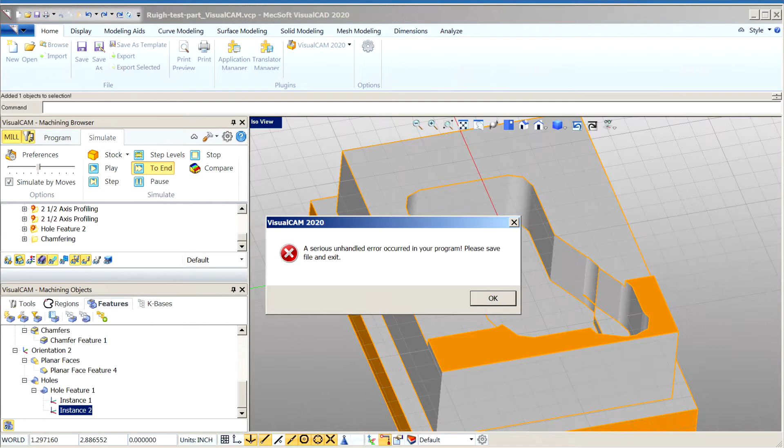I got a crash. It did automatic feature recognition better than in SolidWorks. Found some stuff, I didn't go through it yet. But then it crashed when I tried to simulate it. So that was disappointing. What else did it do?

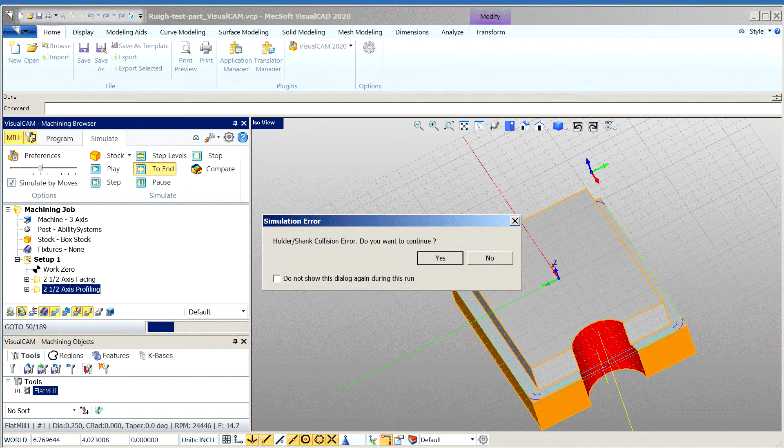It did a tool holder crash. That thing where if it has rough and finish and pocketing and you can remove a slider, it's really cool. Well, if the slider's all the way, I think it does a rapid down through the part and into the vise, through 3 feet down. So here's a picture of what was left after the simulator got done, and said, by the way, did you want to run the tool holder through the part?

That was kind of disappointing. But let's go look at it. It comes up like this. FreeMill is this demo package. It doesn't do justice to how good this program is. It comes across real simplistic. I wouldn't mess with it. Watch these videos or watch other videos.

You want to run the CAM demo. This is a demo program, so you're not allowed to save. I don't want premium, I think that's about $10,000. Professional's full 3D, I think it's $5,000.

Then you re-hit the mill button, and up comes the standalone version, so you're not in SolidWorks anymore. Like in SolidWorks, you want this nice and wide, because then all of this stuff shows up. Like in SolidWorks, this button does all this stuff down here, off, on. And in this button are tools and regions and features and K-Bases knowledge bases and stuff like that.

I put it into turn. Oh my, profile nest, mill. Okay, so we'll take that off.

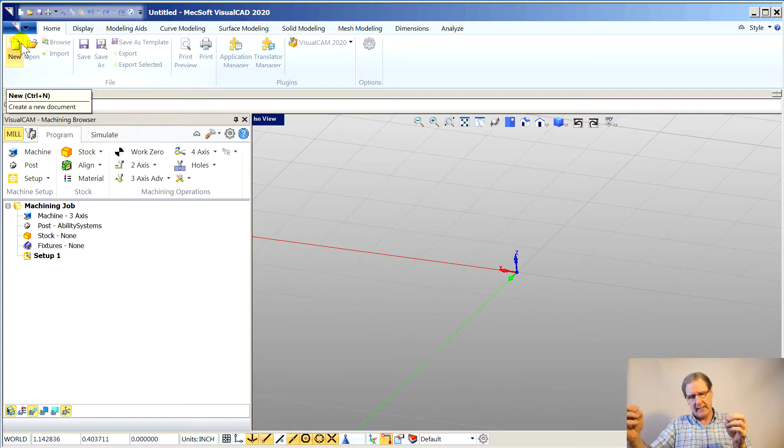For opening, the benefit of SolidWorks, both for CAM by CamWorks and VisualMill, it saves all the tool stuff, all of the G-code stuff. It saves it inside the SolidWorks part file, the SLDPRT. This one creates a new file. So that's configuration manager - is this the file I made from that version? So that's a major reason to be thinking about getting something that works inside SolidWorks. You're just keeping straight of what machining part came from what design part.

So here's where you go home. You say open, and here's a part. See, this has already been saved. VCP is their VisualCAD part file. Here's all the things it imports.

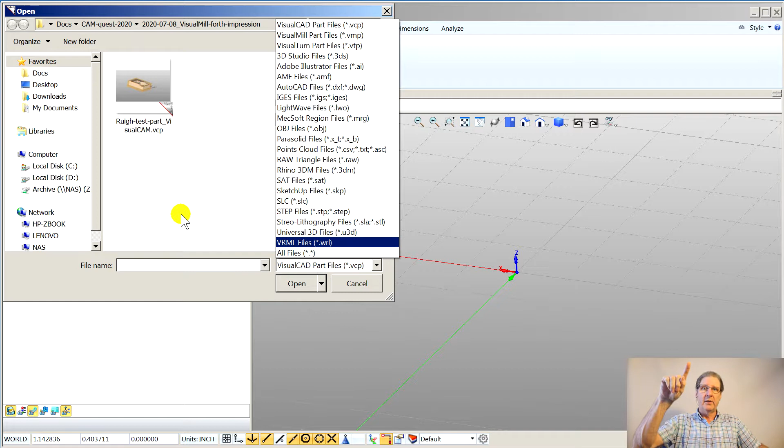So I made this file by importing - I went into my SolidWorks, this Dave Ruigh's part, the one that he made to trick up CAM packages. I exported it as a SAT file, a STEP, and a Parasolid. All of them loaded up, all of them came in here, all of them had the right units, miraculously, although I did have to change VisualMill over from metric to inch. It started out life in metric. But we can just start with this part that I've already saved.

Ask the same question - there's CAM preferences in here. I'm not sure what's going on there. I've already done some options. Here's options, this is the same ribbon style thing. You can disappear, you can make it appear.

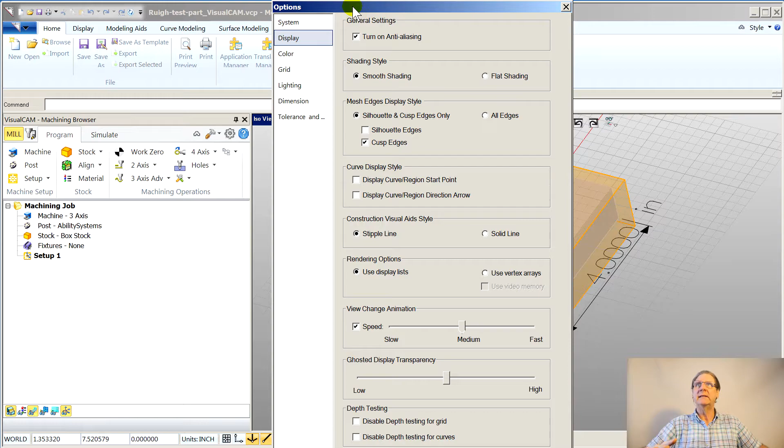Some of the things I did were mostly dimensions. I went to 4 decimal places, all my machinist buddies like that. And then inches here - here's where you specify inches. And when I'd already had the part opened as metric, that's where I noticed, oh wait a minute, go here, find it. Nothing too crazy, right?

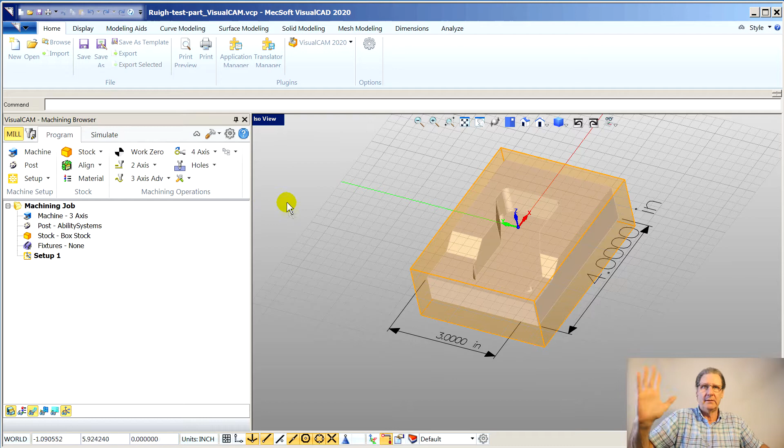All this is standard kind of headache, suffering with software stuff. You should always, when you import anything from anywhere, do some dimensions. That is dimensions here.

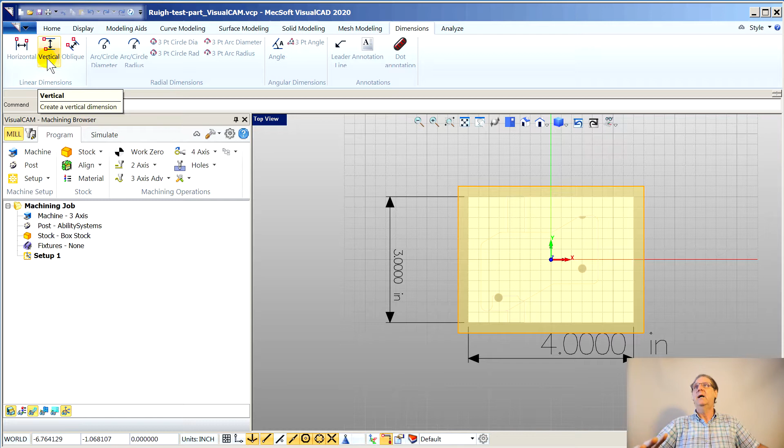I learned you can go top, and then you can do horizontal, vertical. This is all like older - this reminds me of the way AutoCAD 10 used to be. And then, because I went 4 decimal places, you get nice accurate - yeah, this thing is true.

It's accurate, you can see the stock here. You can ignore that, there's the model itself, right? To trip you up, what the middle mouse button wheel does in SolidWorks, the right button makes it swoop around like this. And in SolidWorks, you hold Control, middle button to pan.

In VisualMill, you hold Shift and right button to pan.

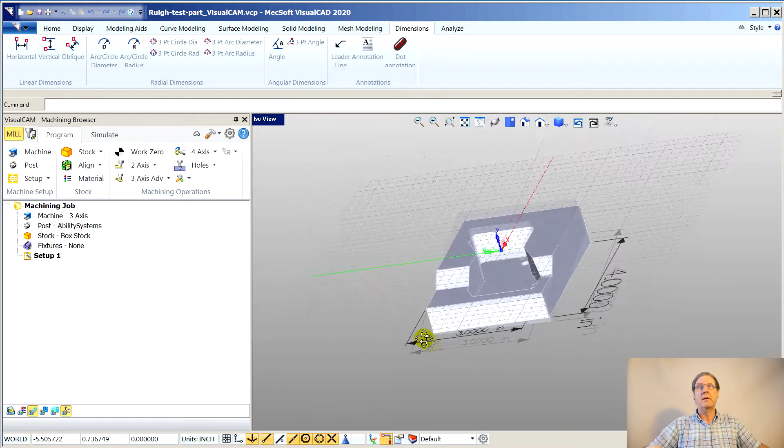Programmers - I don't think there's been 2 programmers born in the history of humanity that have ever agreed on anything. So we'll just have to suffer with this kind of silliness.

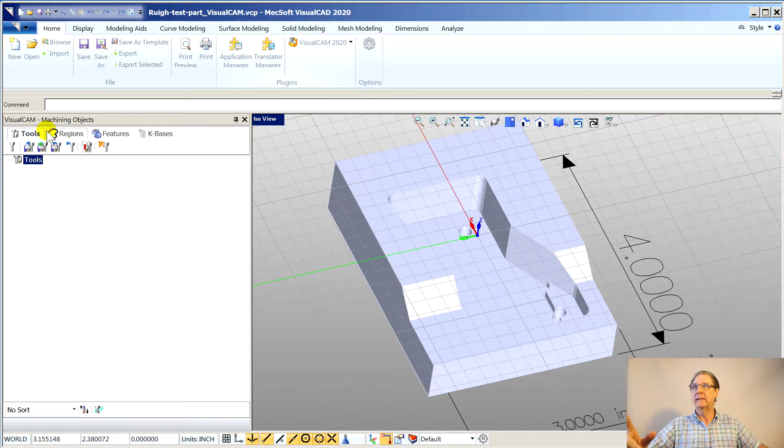Here's the part. One of the things - let's see, since we're going to be drawing, I'm going to jump right into that aspect. Let's close this, which scares you. Oh, how do I get back? That is home, VisualCAM, mill, poof, there it is again. That took a little figuring too. Oh see, now it left that button one open, so close it twice.

One of the things I haven't quite figured out - I go here, I think down here is layers. You can make it wide enough to read or whatever. What I like doing is pinning it, and then, oh gosh, did I pin it, unpin it, get it broken out, and now you can drag it somewhere. You can make it wider and longer, and I drag it off to a different monitor, because you'll be using layers.

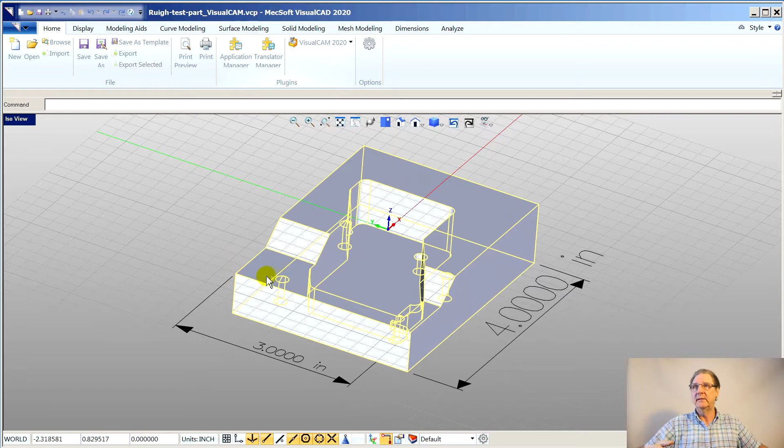This, like I say, it's going back a ways in the way AutoCAD used to work. Still does, I assume. I gave up on it, I had 10 through 14, and that's when I decided no more Autodesk in my life. I started using SolidWorks.

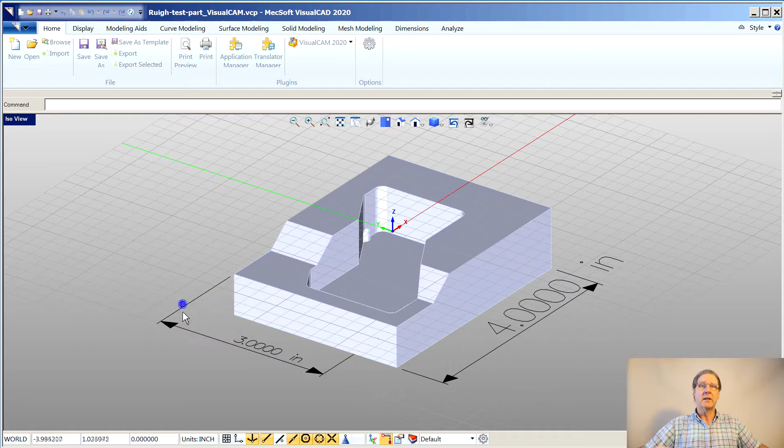So what are we doing? We're showing you some of the things we changed. I'll just start going through it. I'll get to the bug that I can't get around. I'll do that first rather than go in order. We'll face it, we'll profile it - well, maybe we'll get to that before it crashes, because it has been crashing. It's this bottom pocket that caused the problem.

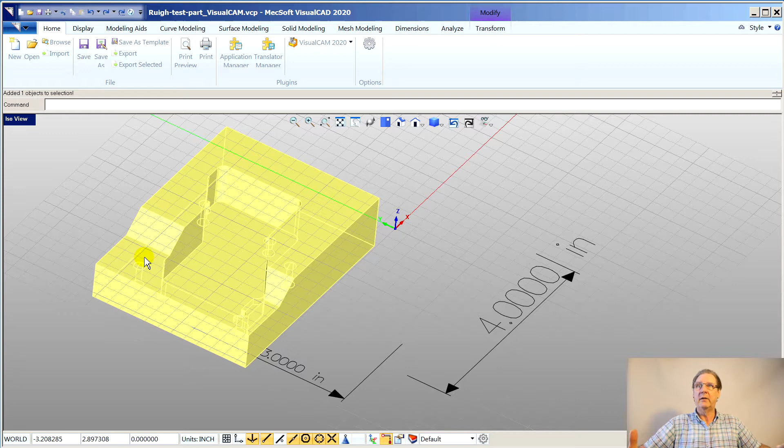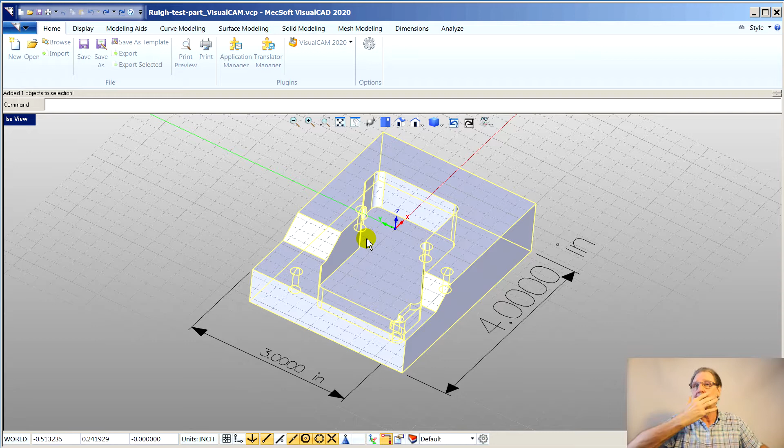Oh, that's what I was going to tell you - one of the things that bothers me. If it was just a left click, you move the part, and I have found no way to disable that. Control Z puts it back where it was. If you go lock, you can lock the layer, and okay, but then you can't select any edges to do any of the things you need to do. So to me, that's very dangerous. If you accidentally click, double click - newbie like me, not a machinist - maybe it moves a tenth of an inch and all the tool paths, half of the parts built one way, half of the parts built the other. I don't know why they're so anxious just to move stuff around with a simple left click.

But that's going on. We're going to go do the sketch stuff.

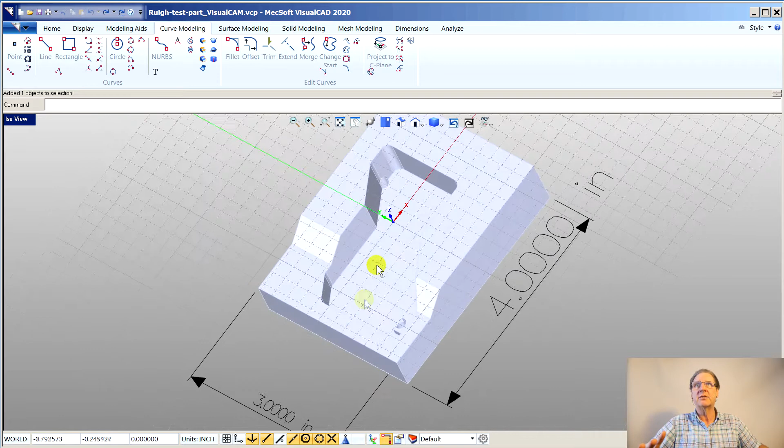One of the key things, where is it - curve modeling. I guess a line is a straight curve to these people, because that's where all the draw stuff is. We want to get this shallow pocket, the one down here, because that's the one where I had to, in SolidWorks, go and bridge across this breakout hole and bridge across this other breakout hole so that the toolpath would be correct - it wouldn't bulge out where that hole broke through.

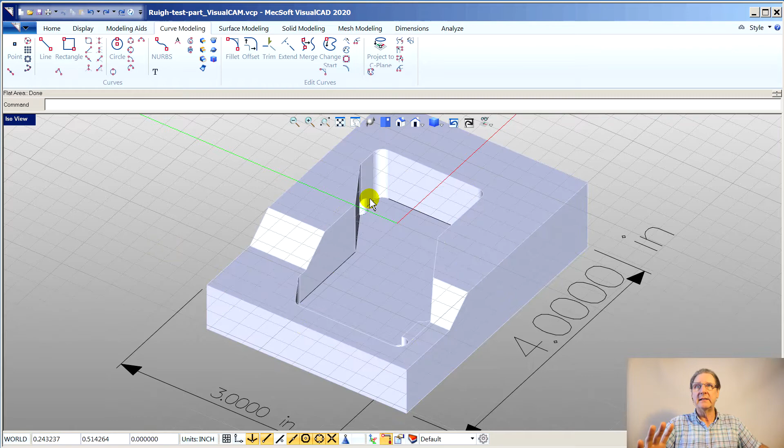So the way I found to do that - could we turn that off? Yes. It's here, I think it was create boundary from selected flat area. Not all, not a silhouette, not a surface, not a face edge, not section curves. Okay, I think it's this - flat areas, you go there, and it's hard to see, like the corners didn't show, but it's got black. Now, one mistake is it put it up high - or no, it didn't put it up high.

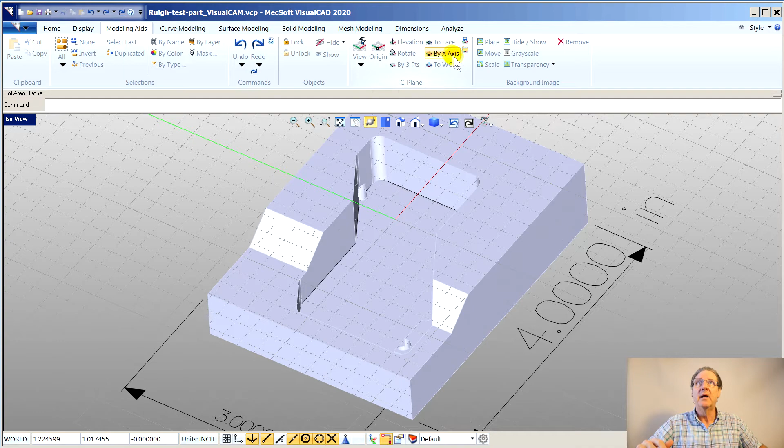This is something also you want to do. Let me think, I think it's modeling aids - C-plane, short for construction plane. You know, you're supposed to - everybody's worked in CAD for 40 years and knows that, right? To face, go down here. Now it moved that construction plane down. That's just going to make things a little more convenient. It's not essential, but like if you're going to see, as we start mirroring stuff, it'll go to that construction plane.

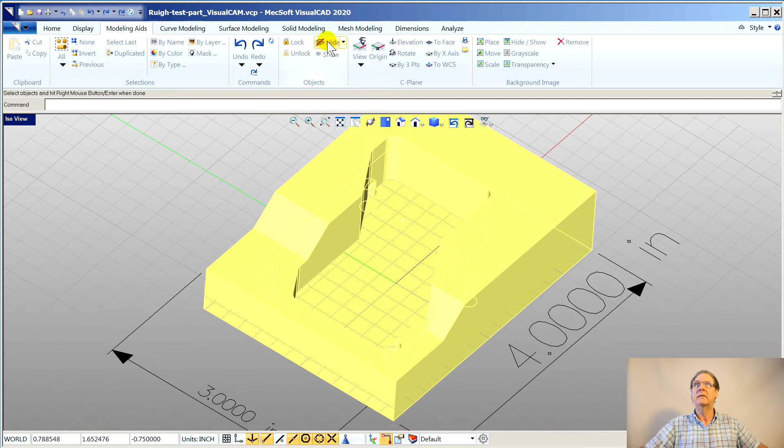So one of the things that was so clumsy about this - I learned modeling aids, say hide, pick it, say hide again, I don't know, and you can get the thing to disappear. Oh, here, let's do this - we don't need these, delete. We know the things came in the right size.

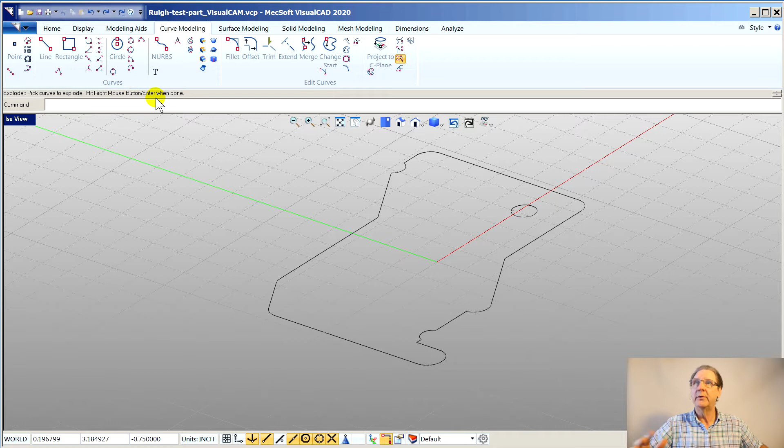It selects - it's a continuous, like a polyline in AutoCAD or TurboCAD or SolidWorks. So the first thing you have to say in curve modeling - I'm going to be a little clumsy on this because this is all different than what I'm used to - break, explode. It does have right here, see right here, explode, pick curves to explode, hit right mouse button or enter when done. So that's kind of nice. Boom. So now it should let us do individual - see, now it lights up individual things.

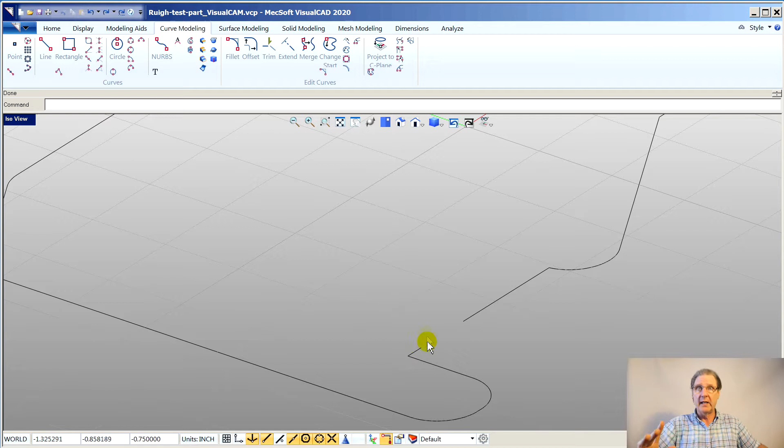So this is the one we want to get rid of, delete. What I did is then I went immediately to extend, thinking it would extend to this line end. No, it extends to the corner here, leaves the line end, but doesn't make it clear that there's a little line segment there, and you spend a half an hour trying to find the open contour that it complains about.

So you got to be sure to know what it's doing to you. But then other stuff works really nice. Extend, bam, done. Now over here it's a little uglier. What do we do? Shift, there. If you remember, well you probably didn't watch that one, but you got to erase this, this, and this, okay?

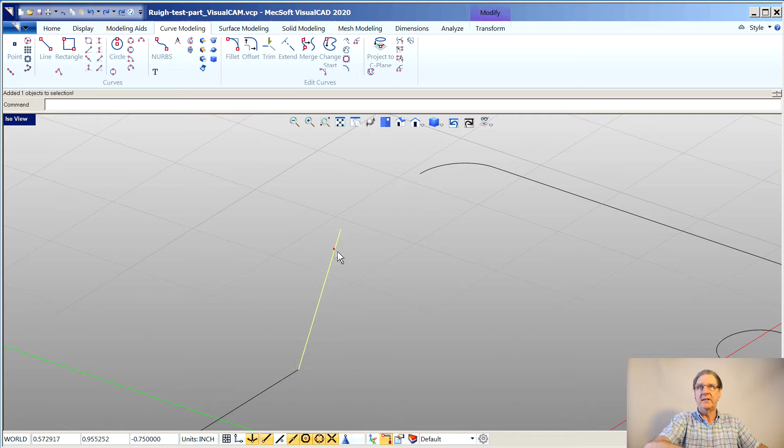And now we go back to modeling aids, show. And, oh wait a minute. Let's do something just to make life a little easier. Hide, hide. Let's go here.

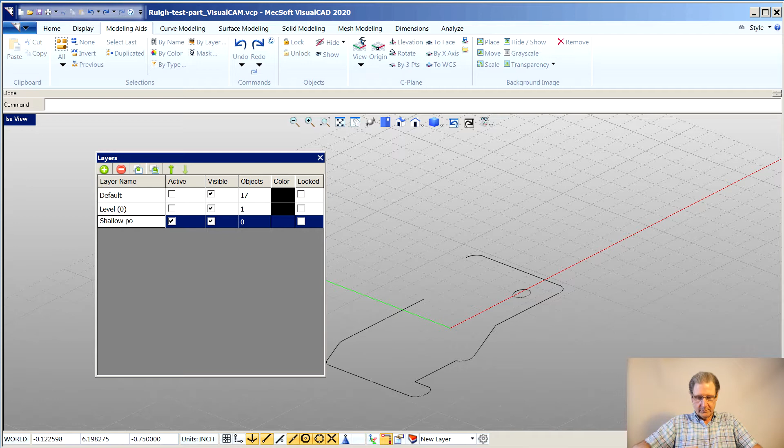Let's get our layers. Let's go plus for a new layer. Of course, then make this shallow pocket. Let's make the color bright red. Sometimes it's a little easier to see.

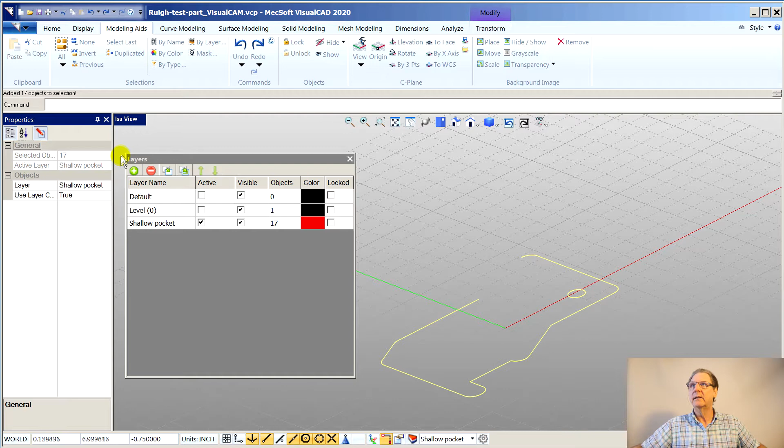It's now active, and I think if you go here you can go properties. A lot of ways to get to it. This is layer, shallow pocket. Now it turned red.

Same thing, you can lock these. This is at least a little more convenient. You can lock this if you're worried about accidentally dragging this around a little. So we got that. Okay, life is good.

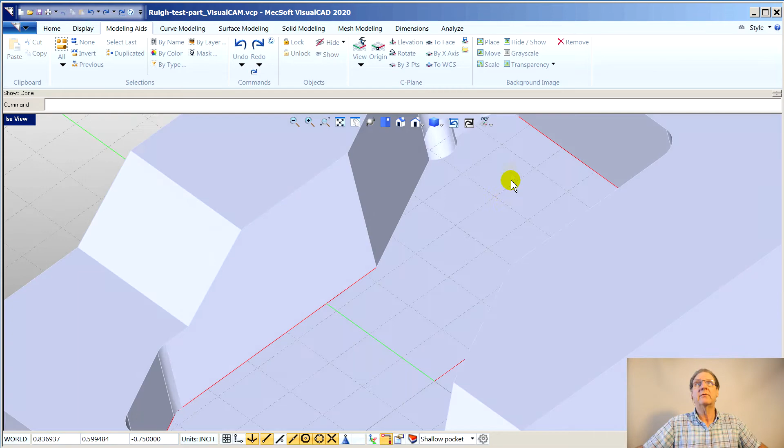Modeling aids, show. I had a lot of trouble, and I assume we're going to have a lot of trouble still. And see, this was designed, I don't know, for 386 computers or something, because you can't really see. You can't see, I can't point at it with the mouse because it lights this stuff. But right here, right, it's disappeared.

That exists, that curve is still there, you just can't see it. That caused a lot of grief. So then, what was the thing I did? It was curve modeling, I think it was edge, something about edges. All flat areas. Extract curve from face edge.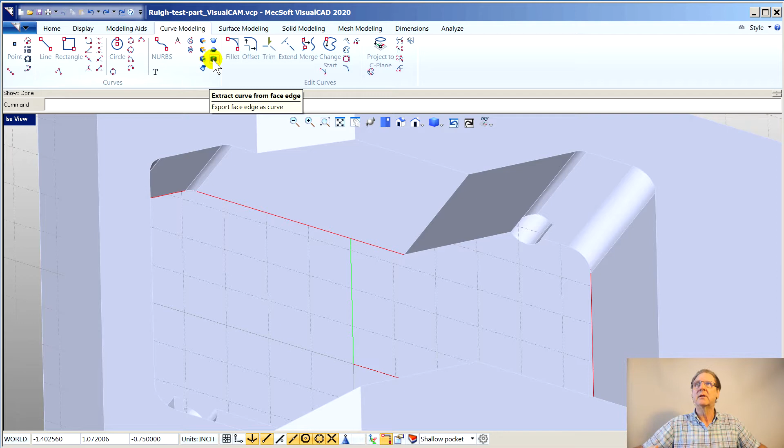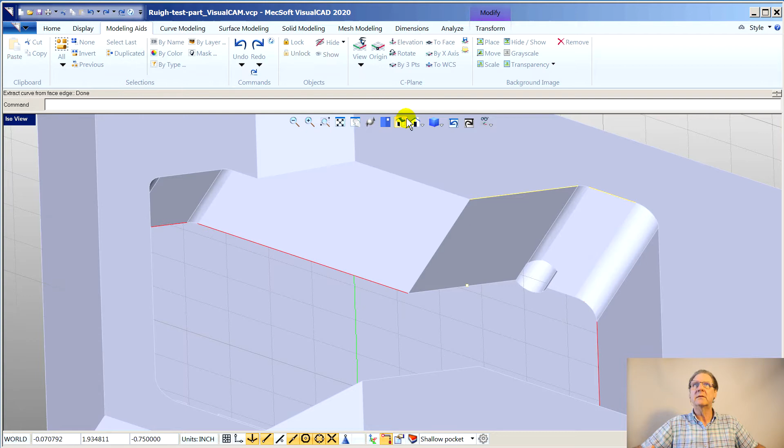See, but a face, I think, is a flat thing. So it says extract curve, select face edges, and hit right mouse button. So I think we should be able to go here and here and hit right mouse button. And then, because you got to pick it, hide.

It's done up here. I've learned it's actually, what do you do? Move. You can then, it'll snap here and snap here. This is, if you can find it, there.

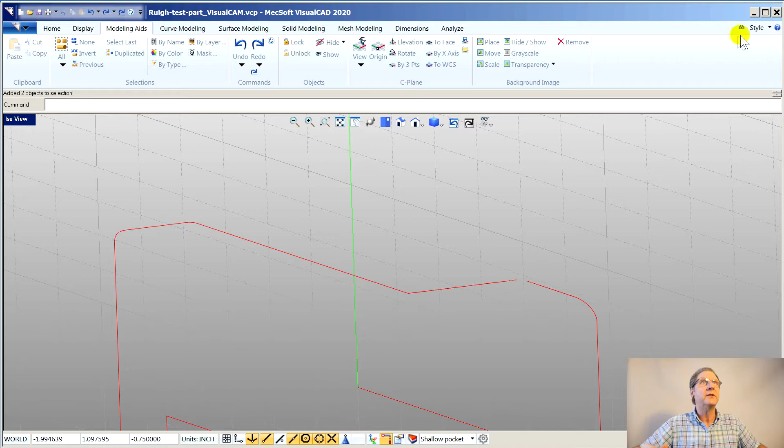Now here's the headache, here's the sorry, can't buy this if it acts like this. And it might just be because of my installation, because there's a Windows 7. Although look at this, look what they do. They're so stylish, and you can select the colors and the theme, if you will. Windows 7 is right in my comfort zone. I love it.

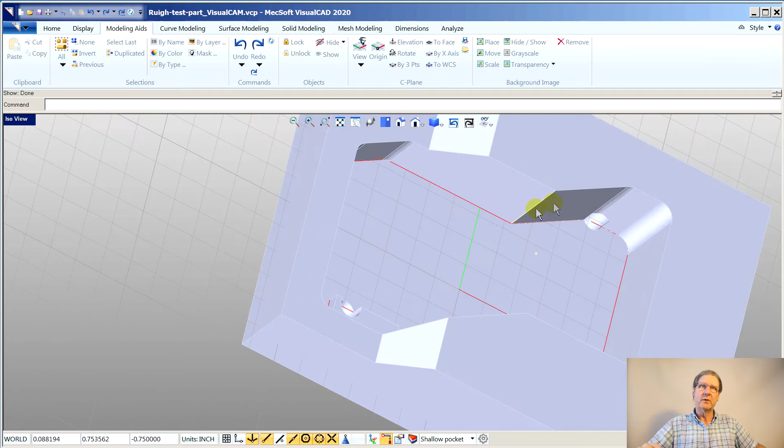So right here, you say, okay, we know how to do this, right? We've been there. Get modeling aids, show stuff so we can see the darn thing. If you're like me, you get lost. Okay, so here's where we're at. This little curve that's up top, we want to end up down there. If we have to move it, that's all okay. We just want that curve.

So I say, watch it work this time and embarrass me. Curve modeling, create section curve, extract curve from face edge. Let's see if this does it. Get up a little closer.

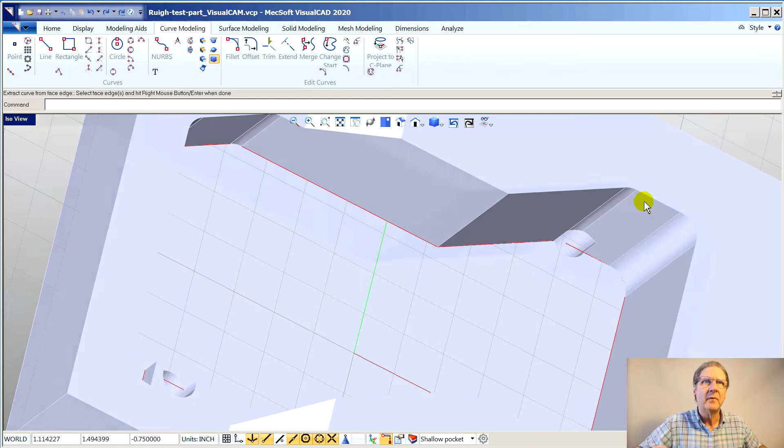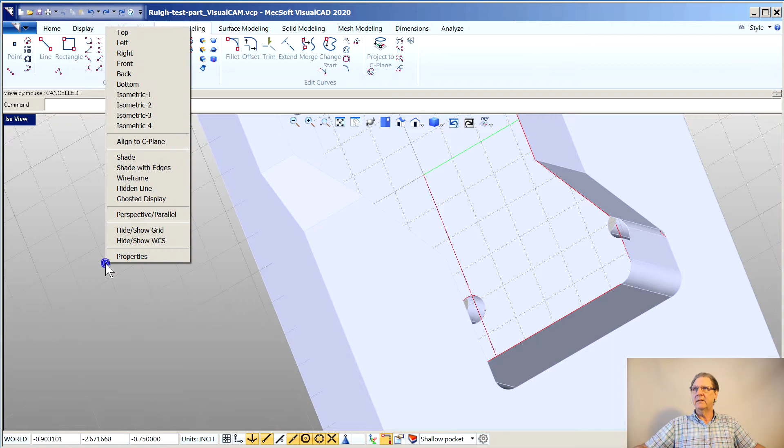See what it did? It's red now. Here, let's do this. No. Come on, come on, come on, come on, come on. Stop. Ah, God. Am I still in some command? It never used to work like this. Stop. All right, holding the shift key because everything's...

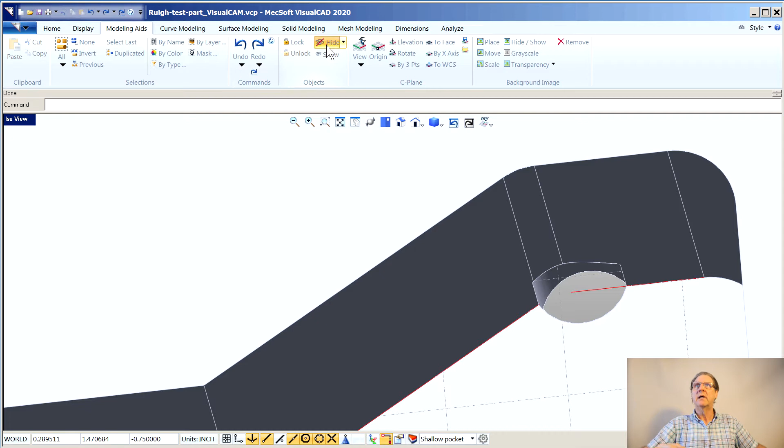It makes some mirrored, weird thing, and I have not figured out how to get a proper curve. Sorry, now let's erase it. Let's hide our goofy... hide here. Hide, I always end up doing it twice. And what I had to do, kludgy as it sounds, draw an arc, which of course is totally unacceptable. That's why, to me, this is a killer.

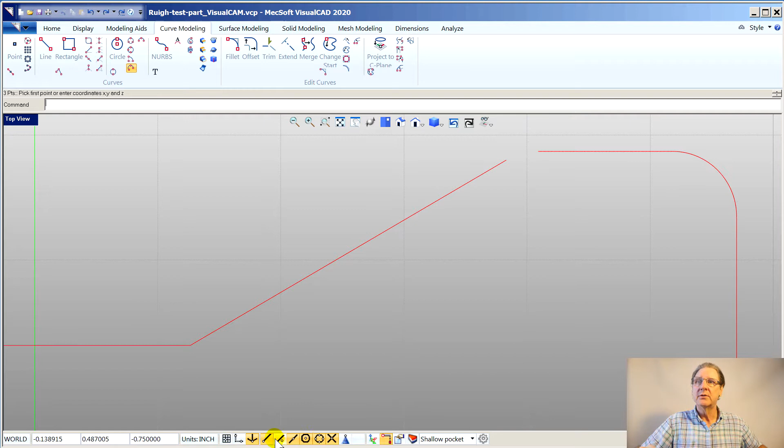Oh, where are we? Curve modeling, 3-point arc. It's got all the snaps down here. This I love, right? They use the status bar. They got some stuff to do down here. So these are the snaps. So that's all normal stuff.

I can't get it to behave the way I want. You got to be careful if you over snap it, we all know that problem, right? You get little line segments you have to trim. So I'm just going to try to guess right there. Trim. Hopefully I haven't left two, right? That's the usual SolidWorks, AutoCAD, TurboCAD misery.

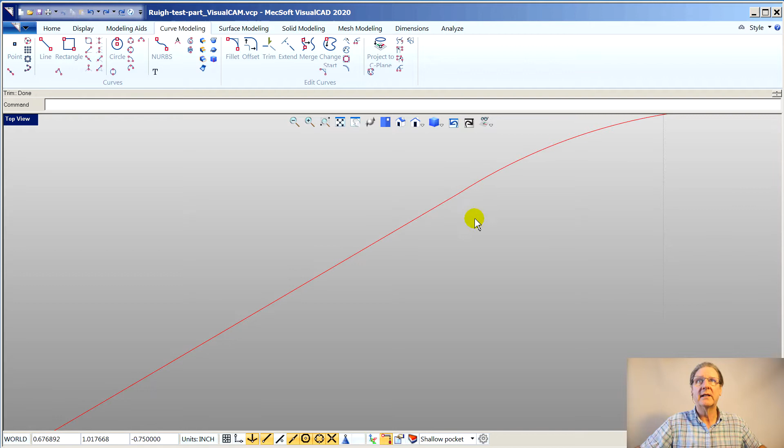Looks like they're not overlapped. So show all. Okay, there we go. Now, let's go turn on our...

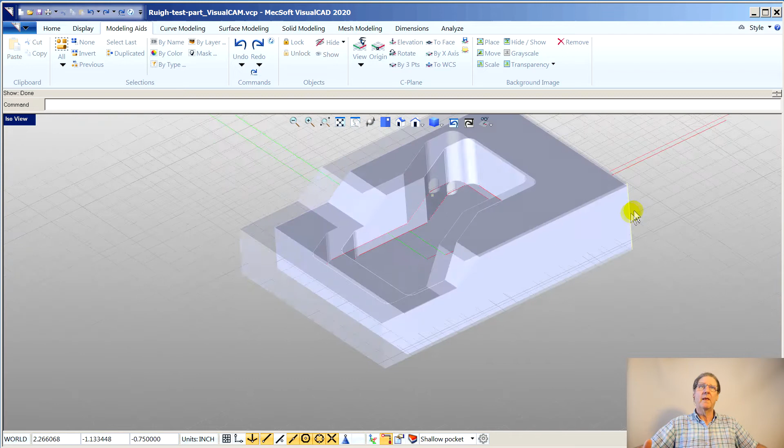See, it's just, you get so confused. Let's go back to this - it's a lot of tedium, right? Just to get to the thing that took 2 seconds. No, it didn't take 2, it took 20 seconds in SolidWorks.

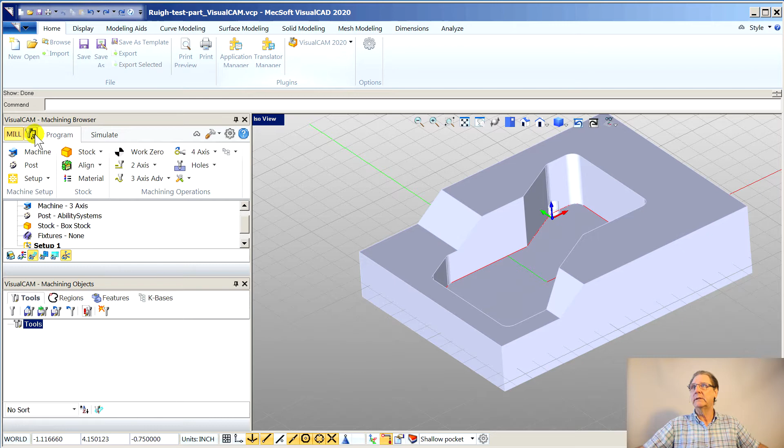What are we doing? Home, VisualCAM, Mill. Here we are. Turn off this bottom panel with this little button. We're in setup 1. Double click setup 1 to get the machine orientation.

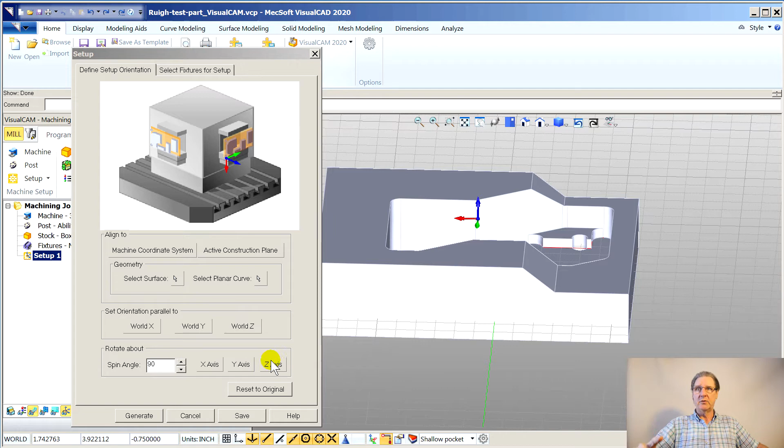I want to put it in the vise like this, fixed jaw in the back here, movable jaw in the front. That means my milling machine, the red arrow is supposed to point to the right, and the green arrow is supposed to point to the back. I happen to know from lots of messing with this program the z-axis is correct, so you say rotate about z twice, once, twice. Say generate. Now that's right, yippee. You notice it also lit up the world coordinate system.

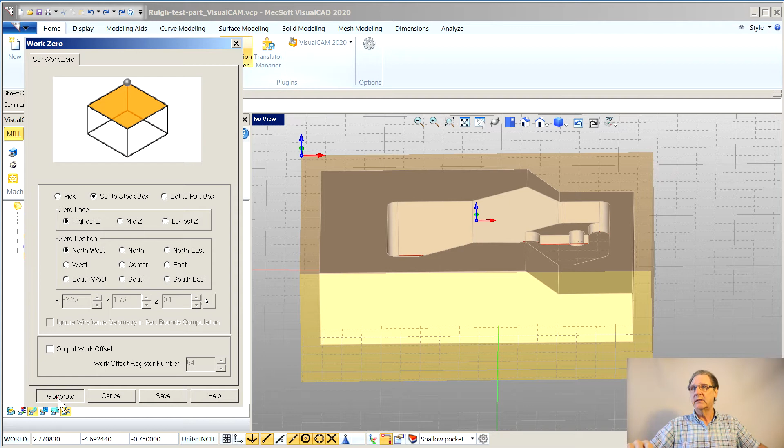Then you do work 0, and I got to bring it in so you see it. Then you won't get the drama if I do it that way. Set the stock box just where I want it - the back corner, that's where I'd put the edge finders and find the corner of the stock to start the machining. Say generate, great. The stock was a bit of a pain, just like in the...

I think I disabled stock, right? It took a while - it's got that same bug where you can put the overall stock size. Let's see how we can do that. Box stock - it's wonderful compared to SolidWorks CAM because you can just type the overall stock dimensions, which you can order from Midwest Metals or one of the metal suppliers. But then it always puts it off on a corner, and you could use these things to relocate it.

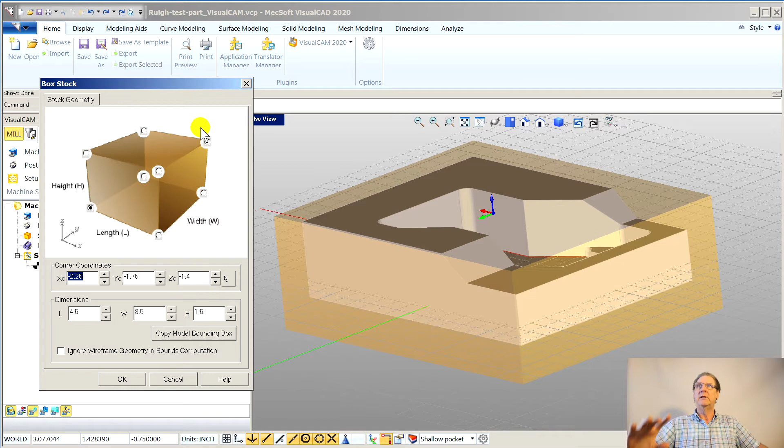But the nice thing is you can say align stock. And what this has done is it's put the part in the center of the stock, which is great for X and Y, and then all you're allowed to do in Z is align it to the top, which made it flush to the top. You see right there? Not too cool.

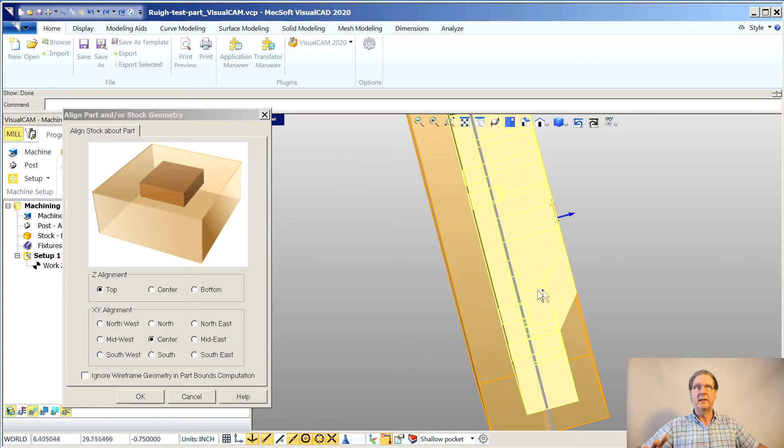Let's cancel out of this. So you figure, I'll align it, then I'll go back to box stock and just move the part down 1/10 of an inch. Now it reverts back - same trick as in SolidWorks. Save it, you're allowed to save it this far. If you don't put work 0, if you don't put anything in, you can save the part, which is what I did, and that's why it came up with the stock in the right spot.

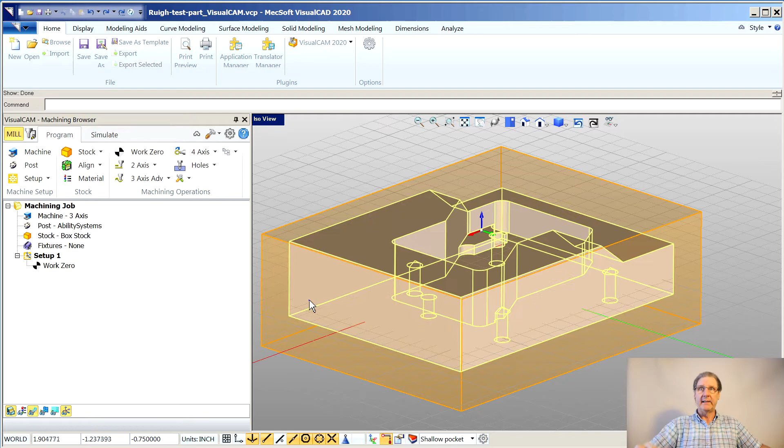So back to draining the swamp. Okay, so let's see what we're going to do. We got our work 0. This might show an interesting problem. We want to pocket - it comes up with the let's get going thing.

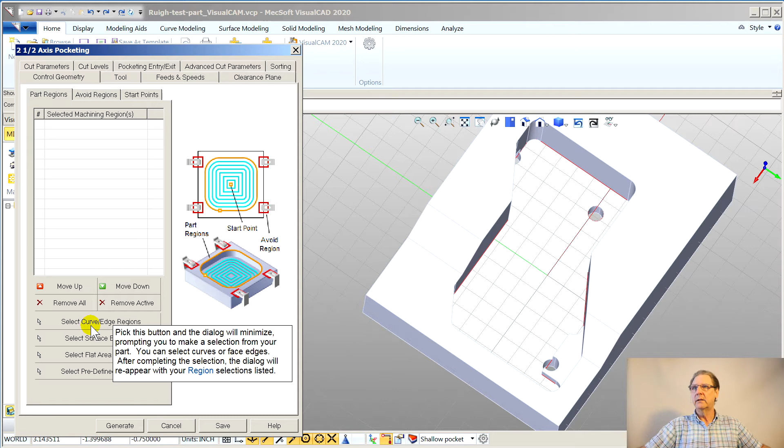Select curve/edge regions, I think you can just do this. No, I didn't get them all. It's like AutoCAD, which I've always loved - if you do that and it's a dash line, anything inside, right? If you just touch it, it'll select. If you're here and it's solid, the thing has to be entirely enclosed.

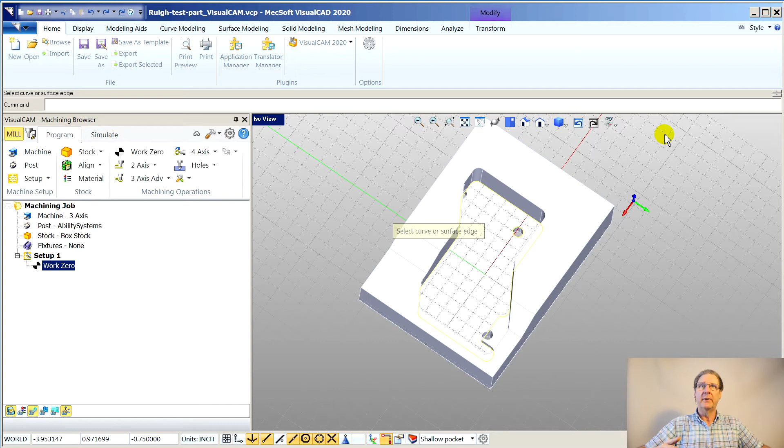So let's do this. Apparently it's smart enough not to do the model. Let's see if - oh, and then their whole thing is you right click, that's how when we were drawing. So you hit the right click. I think it found it all. It might be some open profile. All this might be for nothing.

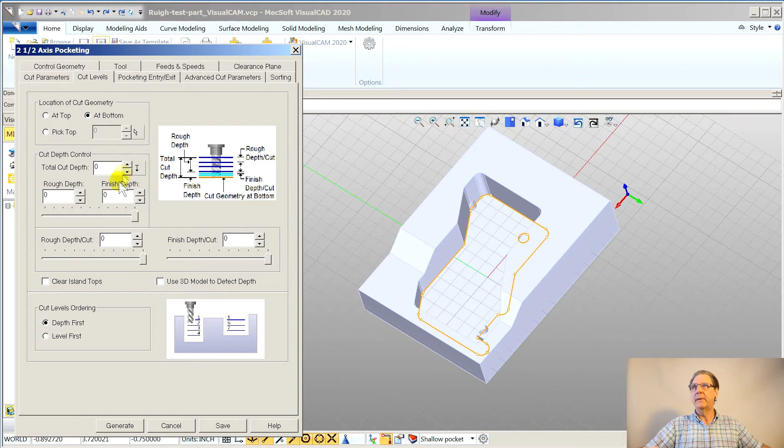Cut parameters, we'll just leave this. Cut levels - the geometry that sketches at the bottom. This is the thing I love about this program, you can specify the depth. Works a little bit different, but right there. Next one, right there.

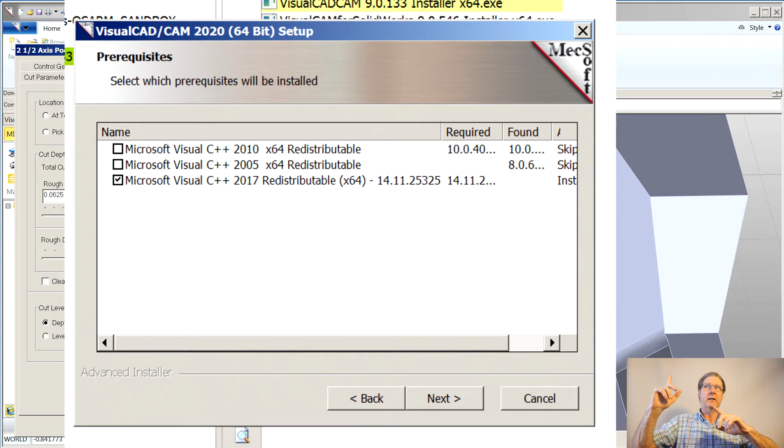0.125 - this is where it blows up. You can't leave it set to 0 here, put it in the middle somewhere. For me, just me, with my old Windows 7 box and this installation that didn't go right because one of the Visual Cs didn't come in. I think I got a screenshot of that. All right, okay.

625, that's good. Generate. Select tool before proceeding, of course. Edit tool - it defaults to a ball mill, one of the minor annoyances. So you go here, pick a flat mill, make it 25. I used to go through a lot of stuff here.

1.3, it has to be at least that long - the tool should be stubby to be stiff. Shoulder length can be short, I think, and then speeds. I want 12,000 here, I know, go 16. Why it fills in these weird numbers, 30, 15 - you need a rounding algorithm. Okay.

This is what burned me last time - saying okay, it didn't create the tool, we got to do it all again. And I'm going to make you suffer just like I just did, because this happened a couple times in the SolidWorks version, and it just annoys the living daylights out of me. Save as new tool is what you're supposed to hit.

Why, well, it's suffering with software - true to the name of the program. 15.

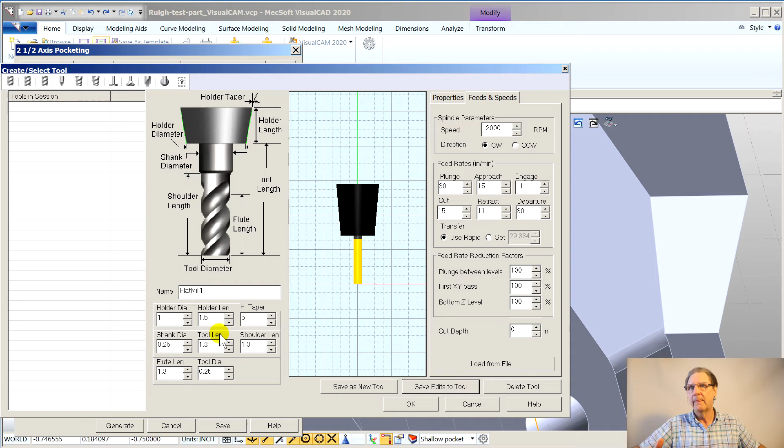Say create tool, make it a quarter of an inch. This is what I've been fighting. And, oh no, I did it again. And then of course it made it a ball mill because that's not what I wanted. Oh gosh, I get so frustrated.

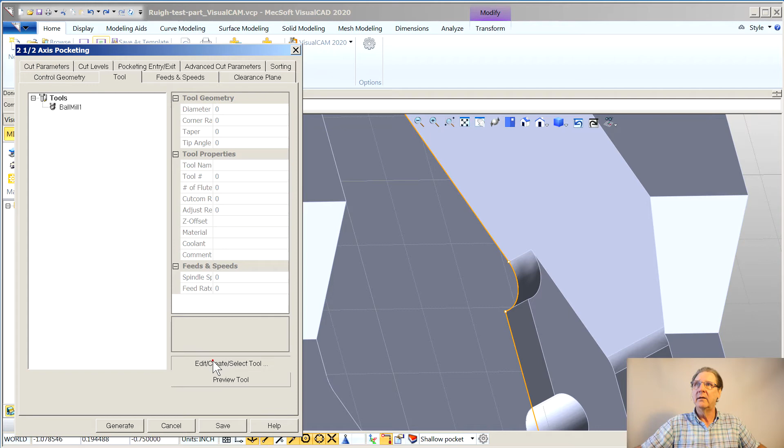Hang on, we're still draining the swamp. Flat mill, 2/10ths, say okay, finally. Okay, so generate.

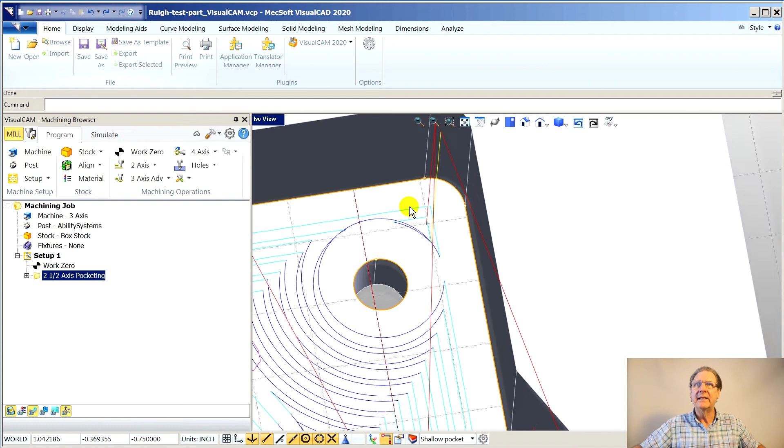It actually did pretty good. Now hold shift and the shift and the right button, like in SolidWorks. Oh, it's not even close enough to get, let's light this up.

I like a little housekeeping. Shallow pocket. 1, 2, 3, bang, shallow pocket.

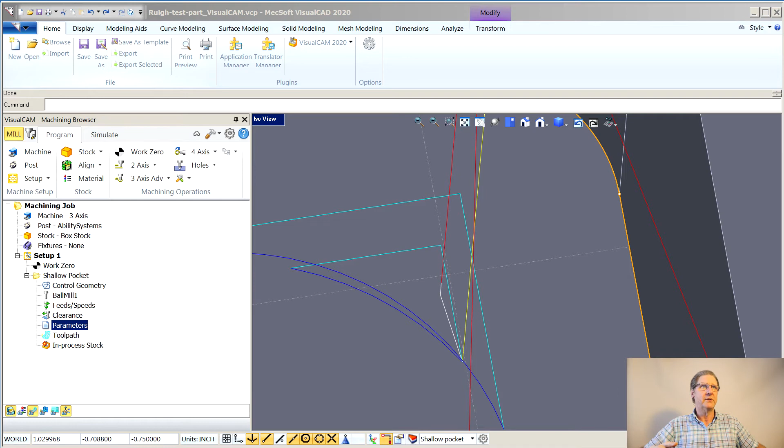Parameters - if you double click shallow pocket, it gives you the whole dialog box with all the control geometry. If you just double click parameters, it gives you the parameters. And here is where we suffered.

Well, first you can make it a 10,000th of an inch. You want this thing accurate, and you want advanced cut parameters to be 10,000ths of an inch. That's going to put a little radius in the corner here instead of a straight line segment.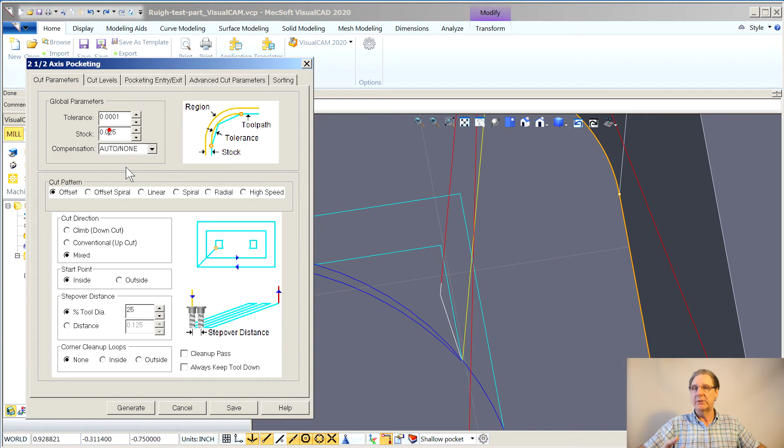Cut levels - this gets changed automatically. I found it's best to generate it once. There. Let's hit it again. 0. Generate.

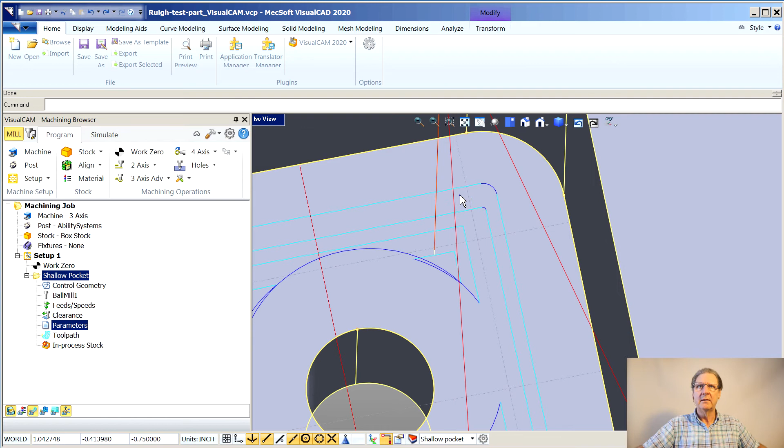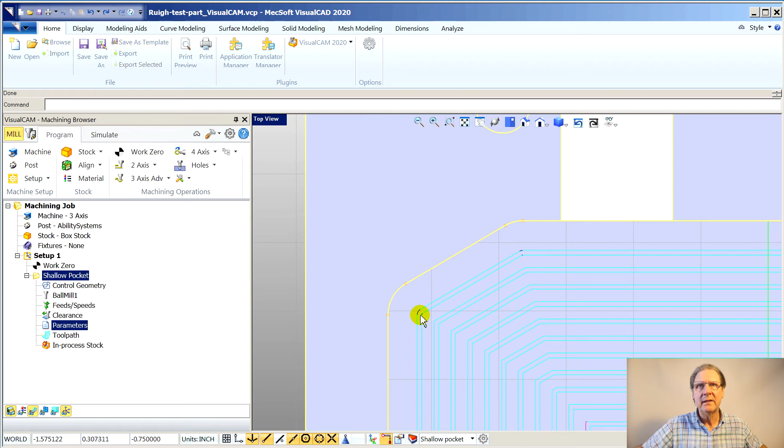Maybe it's got some weird step over problems. I don't understand what's going on.

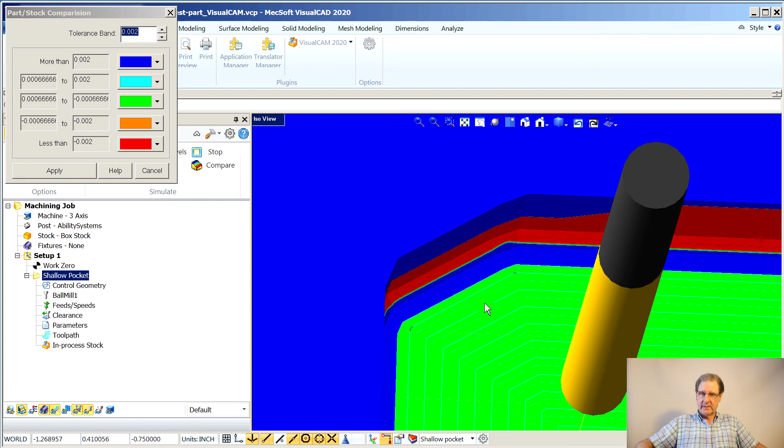Well, the way to find out how bad things just went is say simulate to end, compare, and you can see gouges and undercuts and all kinds of terrible stuff. So this is a new problem I've had. I am not sure why it's doing it.

It's, oh, because we used a ball mill. That doesn't help, does it? Use the flat mill, say generate.

All right. Good gosh, I'm having troubles. You can see what I've been going through for 2 days.

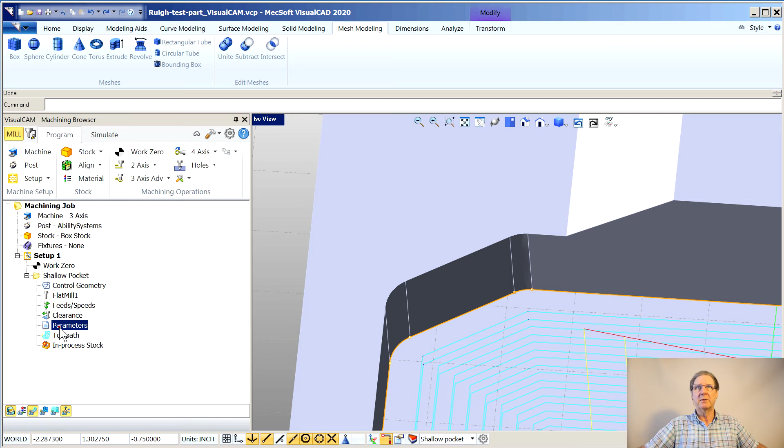Let's see, usually it blows up at this time. No, it left stock. It's been putting a 1 here. It just can't seem to do it. Generate. Could not find valid data.

All right, close. Do you really want to cancel and close? Yes. I just crashed it.

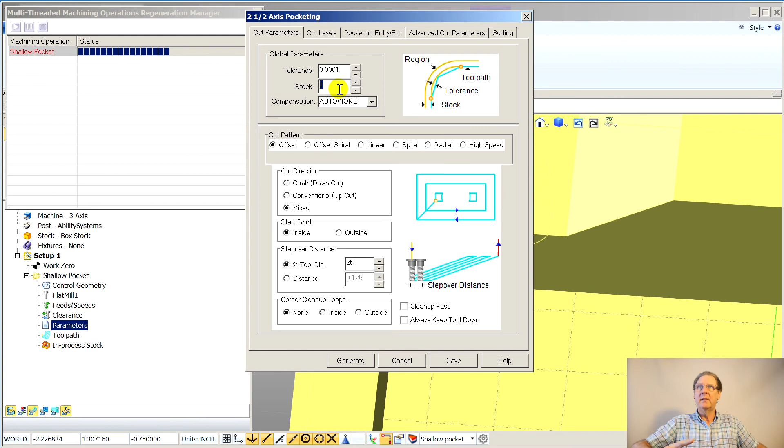Look at this, it's regenerating and it still let me come up here. Cut parameters - instead of 1, let's see if we can save this thing in the middle of a crash. 0.002 has always worked. Generate.

Well, caught live - we're going on 26 minutes of suffering with this thing.

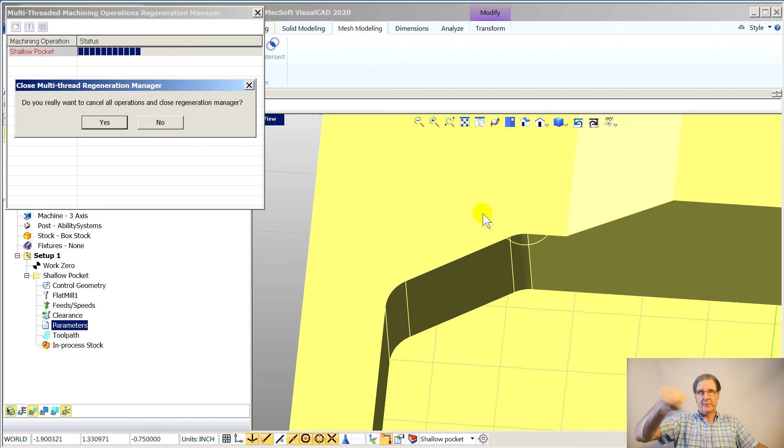Needless to say, because of that, it can't throw an arc up onto, project an arc onto a surface without reversing it and making it goofy. I can't use it. I will.

I hear the hard disk percolating. Let's do what we can do. Do you want to save them? Sure. Can't be saved. Well, all right.

So what can I say? There are certain things I do like better. When I did get it to work, one of the many times I had to go through this, it actually was a little more accurate - where like the perimeter that was a yellow color, off by more than 3/10,000, it was all green this time. I don't know how different the math can be in this one versus a different one.

But not for me, right? Because of the configuration management problem, that you'll have a part file and this VCP file or whatever it is - just too many chances to get confused. And what file, what did they make in the shop? Oh, was that file? Did you have a newer file? Oh, when was the date? If it's in the SolidWorks part file, you still got configuration management problems of what rev it is and who touched it and who checked it out.

It was easier in the paper days. I'm old enough - there was a paper master vellum drawing. You checked it out and nobody else could mess with it because you had it on your drafting table. Now, not so much. So that's my rant.